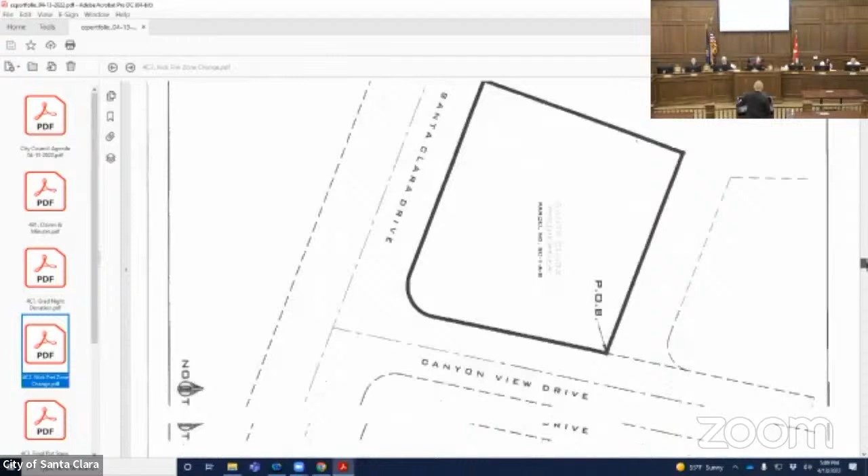So Nick Fry is here this evening. He's the owner of the property and would like to rezone it. Let's scroll down to his site plan. We have a conceptual site plan laid out, as well as building elevations, so both the Planning Commission, which held their meeting a few weeks ago, and the City Council could get a feel for what's being proposed by the applicant on the property.

The property is currently zoned planned development commercial. The applicant would like to rezone to the commercial zone to allow for a new bakery and manufacturing use on the property, the new building you can see on the conceptual site plan. Currently these uses are being conducted in the back of the existing convenience store, so we wanted to provide you with some information so you could see the plan.

You can see where the proposed building would be located, the parking, and the layout of the site. The applicant would move forward with painting the parking spaces on the north end of the site, as well as the southeast end, where there's currently vehicles parked from time to time but no designated parking. You can see the designated parking plan in front of the building. Also, a dumpster enclosure is something we've talked about that's not currently on site, as well as making some improvements to landscape areas - that's something we'll discuss at a later date.

But right now, I just wanted to give you a little bit of history of the site - in case you didn't know it, you probably know it better than I do, but a little research here.

Nick went through a rezoning process in 1986. The property was zoned R110 at that time. He had it rezoned to neighborhood commercial so he could build Dutchman's.

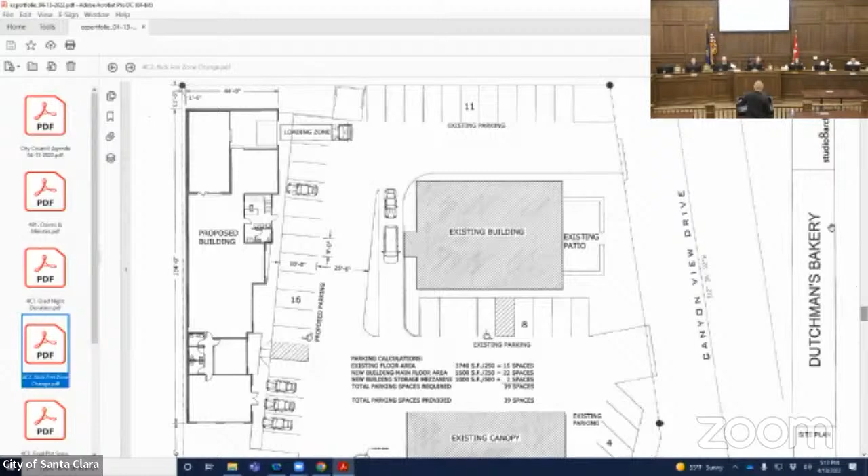If you could go to the building elevation, I believe it's right after this. They're conceptual in nature, you can see the drawings here. You see the existing Dutchman's with the red roof, and you see this building. It would be stucco and I believe a CMU split face gray block with some metal awnings.

You can see to the left, maybe to your right or to my left, that end cap would be for an office space, and the rest would be for his warehouse and manufacturing business associated with his brand and what he's currently doing in the existing building.

As far as state code consideration, we do meet all those requirements. We noticed it, we put signs on the property, put it on websites and posted it in public locations. The Planning Commission held a public hearing on March 24th, 2022 and forwarded a recommendation of approval to the City Council.

At this time, planning staff recommends that the Santa Clara City Council approve the Nick Fry rezone from the planned commercial zone to the commercial zone for the property located at 2300 Santa Clara Drive, subject to the following conditions, and we have two. First, that the applicant be required to submit a site plan application as per city code, chapter 1766, commercial zone.

Second, that the applicant be required to go to the planning commission and city council for site plan review and approval. So if this rezoning is approved, the applicant will come back to both the planning commission and the council as per the zoning ordinance, and go through that process. And then subject to the following findings, that the rezoning is compliant with the Santa Clara City General Plan, section 3-4-2 mixed land uses, Main Street commercial.

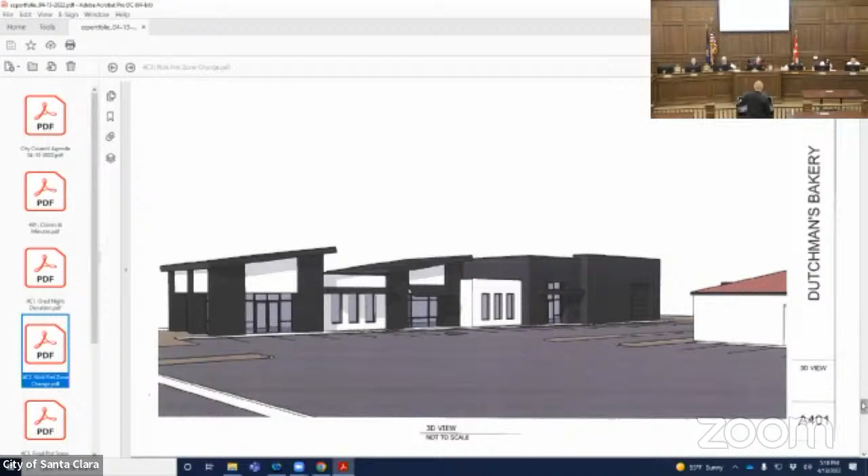Okay council, if there's no other questions, then I would look for a motion. I move that we approve the zone change from PDC to commercial to accommodate the new building. I'll second. A motion by Denny and a second by Jarrett to approve the rezone from PDC to commercial C zone on 1 acre of property at 2300 Santa Clara Drive. Any question on that motion, council?

Probably just include the recommendations. I mean, maybe it's part of it, but there were 2 recommendations. Is that right, Jim? Yeah, we had 2 conditions plus 2 findings. Okay, make sure we're legal and compliant with our general plan. But double check the one condition. Yes, I will check on that this evening or tomorrow morning and get with Chris. And we'll make that part of the motion. I'll second.

Any other questions, council? This is a zone change, let's do roll call vote. Jarrett, aye. Denny, aye. Krista, aye. Lena, aye. Ben, aye. You guys have it.

Get her done, Nick. You're our first manufacturing facility, make us proud. The Dutchman, you know, some cities have caterpillar plants. We got Dutchman cookies.

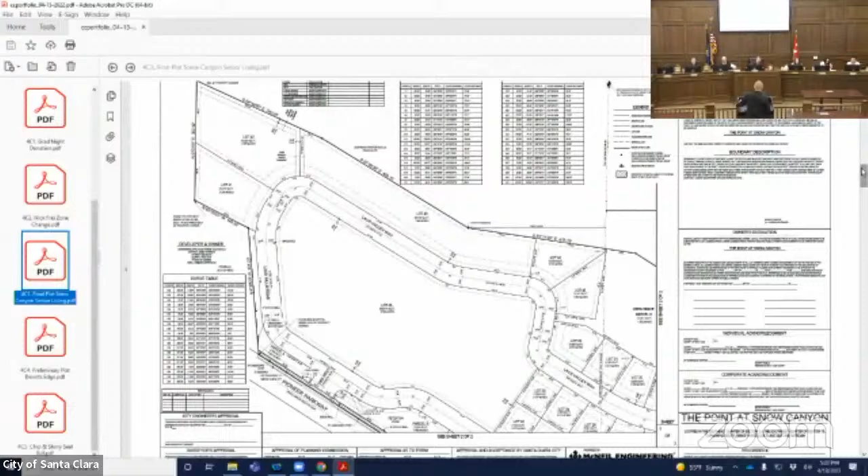Previously, when this was reviewed, when it went through a project plan amendment and preliminary plat, we did take a look at building materials, amenities, and site landscaping, and that went through a planning commission and city council process. At this time, I'd like to go through a few highlights or items we need to discuss here at final. The plat is up and it's a final plat. Our next item is preliminary, so I will try to keep my focus on this one.

When this went to Planning Commission on March 24th, we had a discussion on public streets. Logan Blake's on our Planning Commission now. He's a PE, and he did ask that question about the streets, that they be identified as public streets. So all the streets in this project are public. Next to the street name, it will say public street on the final plat, just to make sure we're clear. I've seen that in other places I've worked, just making sure a public street is identified. So that's something I included in the conditions if the council's comfortable with that.

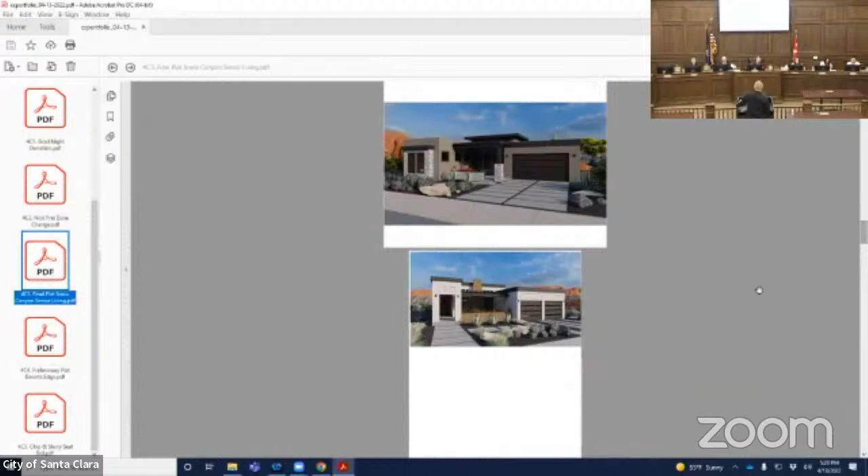As far as the building design and materials, I think if we scroll down, and I do have quite a few exhibits in these two, but we get a feeling here for the single family homes, quite nice. The look fits in with Entrada and the adjacent neighborhood. Materials include stucco, natural stone, a roofing membrane system, and decorative metal to provide visual interest. We believe these single family home designs are quite nice.

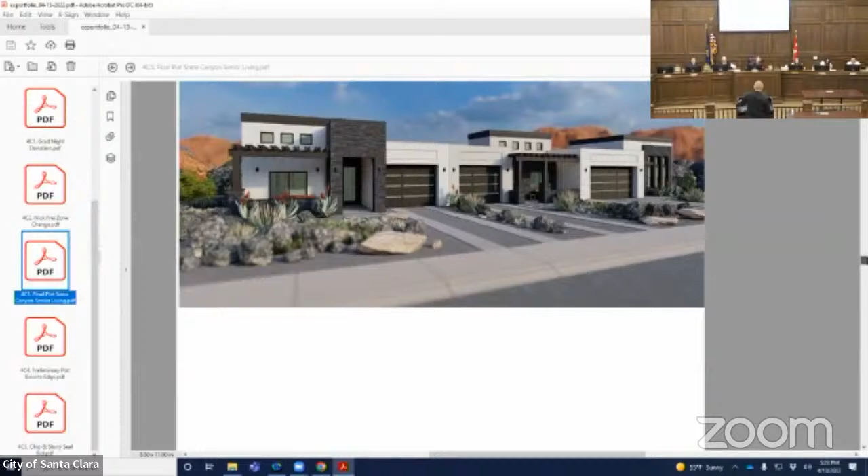If we scroll down further, there's the twin homes we talked about, 15 of those, and those are quite nice, the multifamily twin home style. Further down, we have an assisted living rendering. It's nice, very similar materials. It's got a portico, which is the architectural feature you see there with the individual. That'll be really good for inclement weather, like the big old windstorm we had the other night that messed everybody's cars up if you had one outside. But that'll be nice for loading and unloading.

The project has been designed to be compliant with the PDR zone as far as height. The height standard is 35 feet, that's the maximum height. So this building will not exceed that height requirement. Kind of going back and forth, I just don't want to make Brock go up and down too many times on these drawings.

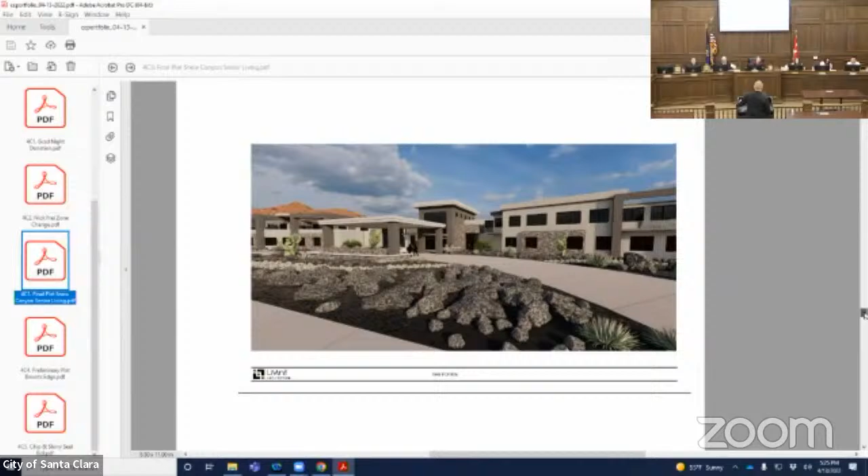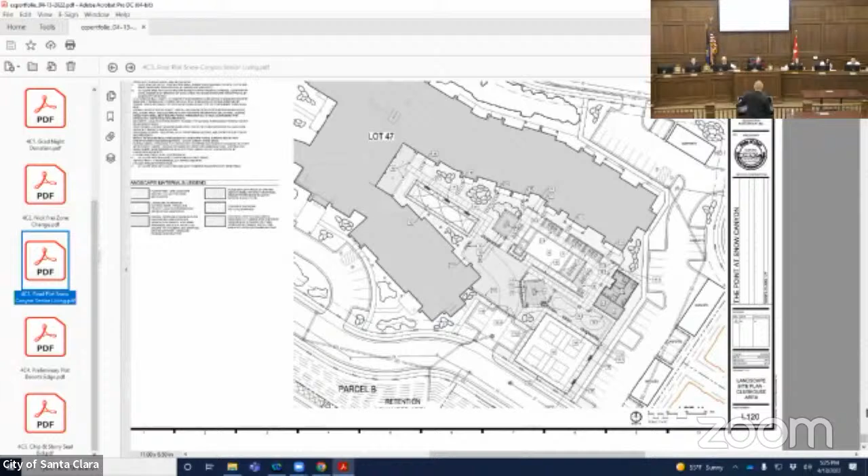It packs a punch. So the proposed amenities include a pool house, an outdoor pool and hot tub, outdoor fire pits, pickleball courts, a bocce ball court, putting greens, and seating and lounging areas. Inside the building, there's a golf simulator and an indoor room with bar and business lounge that can be reserved. Additionally, on the plat, and we'll go back, we don't need to do that yet.

We do have the open space area identified as parcel B. That's to remain more in a natural state with some trails and some seating areas, more of a natural look rather than an improved look. These amenity areas will be available for all residents and guests of the senior living community.

That's what's required. The landscaping - they've spent quite a bit of time on the landscaping plans. We've spent a lot of time reviewing them as well. They're going to be required to meet ordinance 2205, which is our new water efficient landscaping and conservation standards.

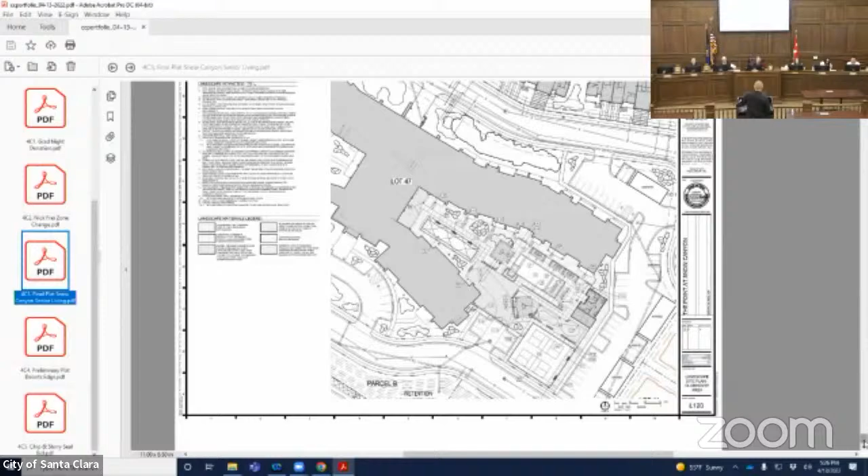The zone does require a minimum of 30% open space. The applicant and designers have indicated the plan includes approximately 40% open space. If we go back to the preliminary plat, there's a couple things I'd like to bring up.

As far as project fencing adjacent to Pioneer Parkway, there will be a 6-foot stucco wall that will be required to be put in, and the applicant's aware of that.

Also adjacent to Pioneer Parkway, there'll be a planter strip and a sidewalk. The applicant's required to install a 10-foot planter strip and a 5-foot sidewalk along Pioneer Parkway, as it is an arterial roadway. So that will be a nice feature for residents here and other city residents that live in the community.

Recently, we've talked about water availability, and I have to bring it up because we adopted the ordinance, the model ordinance, and we made some changes to it. That's section 1792 of our code now. It's been adopted and put into ordinance.

Within that, we talk about a will-serve letter or other verified documentation from the Washington County Water Conservancy District prior to final plat recordation. There's been a little bit of back and forth, but that's the wording the way I understand it, and we'll need something from the Water Conservancy District.

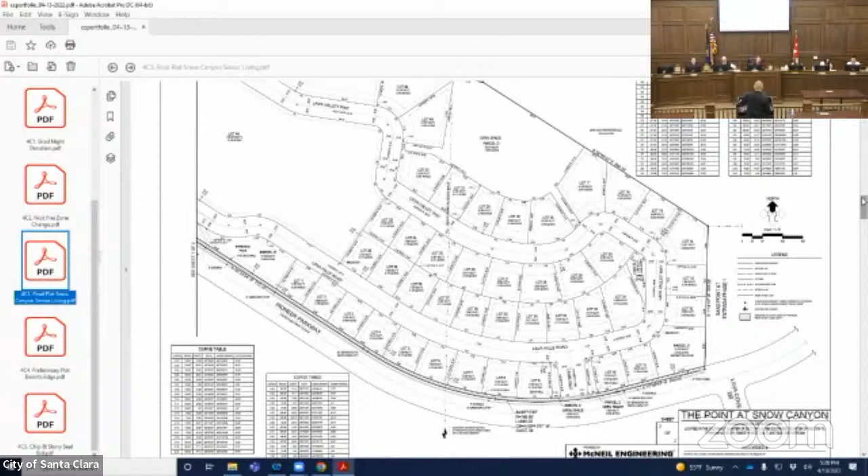We talk about dust control, it's major. This is a big project. We've had a little bit of that already with utility and road work done out there, or the temporary road for the sewer line. So we need to make sure, and the applicant's aware of that. I just wanted to bring that up.

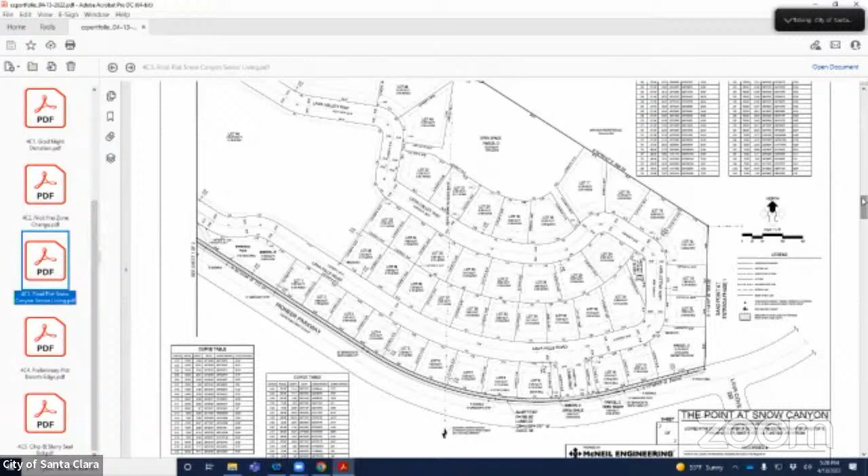Reviewing departments, we've had a pretty thorough review. As you can see in the report, the building department - a geotech's going to be required. Parks and trails - this is something that Brad has helped us understand, and I'm glad we have it here and the applicant's willing to do it. They will provide a trail gate in the western wall, or the west part of the site where there's a wall, and it's a minimum of 6 feet wide to get to the trail in the area.

Fire and police - their concern was making sure we had access for emergency vehicle or apparatus within 150 feet of the assisted living facility. Power department, public utilities required, public works - again PUEs and signature blocks on a final plat. State code considerations as far as noticing and having public meetings. We've met all the statute requirements.

So our recommendation is as follows. The Planning Commission held a public meeting on March 24, 2022 and forwarded a recommendation of approval to the City Council. At this time, planning staff recommends that the City Council approve the final subdivision plat for the Point at Snow Canyon Senior Living Community, subject to the following conditions. We've outlined 12 conditions in the report.

And then condition number 2, there was a sentence added that said all public streets be labeled as public streets on the recorded plat - kind of what Commissioner Blake recommended. Let me know if you're okay with that.

The applicant, Clint Tolman, and his engineer are both here if you have any questions of them. Do you have any questions for me at this point? Questions for Jim, council? All right now. Okay, thanks.

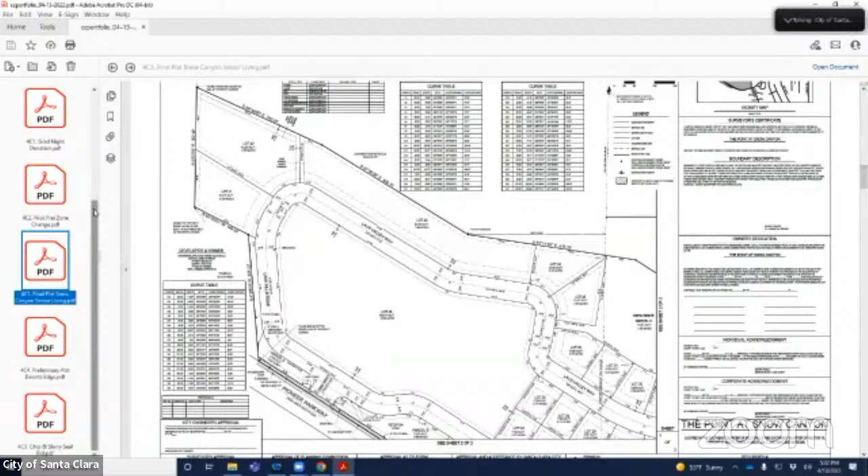Okay. Item C4, consider approval of a preliminary plat for Quail Crossing and Coyote Landing at Desert's Edge, generally located east of 400 East and north of Northtown Road. Robert Smith, applicant. Jim?

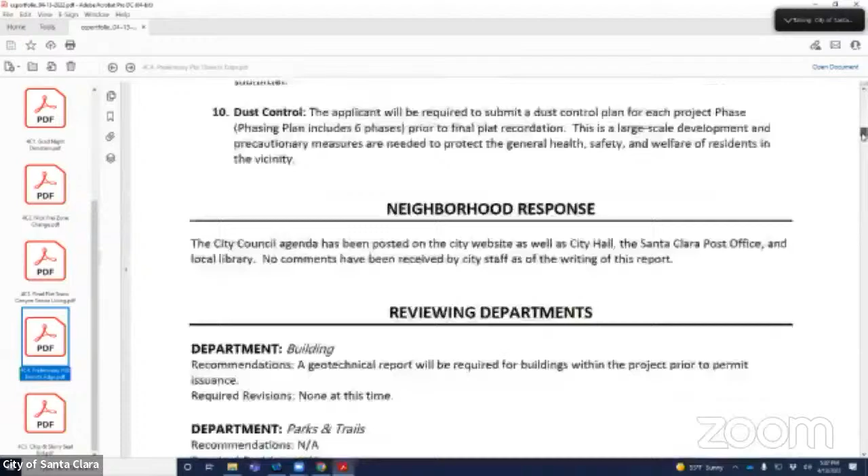Thanks, Mayor. So we've got this one back to you tonight. It's an exciting project that we've talked about a few times. Most recently, we had a discussion in March about the phasing or the project plan. The applicant, Robert Smith, came to the council during a work meeting to discuss a slight density increase to the plan of one additional unit. That item was taken to the Planning Commission on March 24th and approved by them before we discussed the preliminary plat that evening on that agenda. So they did allow for the density increase of one additional unit to 240 units. The property is just over 20 acres in size, so the proposed density is at 11.99 dwelling units per acre.

And so the preliminary plat is up, and that's where I want to work from for now. So thank you for bringing that up. There's a lot here in the preliminary plat, it packs a big punch. There's a lot going on here. It's both projects, it includes Coyote Landing and Quail Crossing at Desert's Edge. One is a multifamily townhome product, and the other is an apartment project designed to be affordable, with rents ranging from 30 to 80% of AMI. The applicant has captured Utah Housing Assistance and will be utilizing that program. I believe the great majority will be at 50% of AMI, but we'll let the applicant clarify that if the council would like to have that discussion with him.

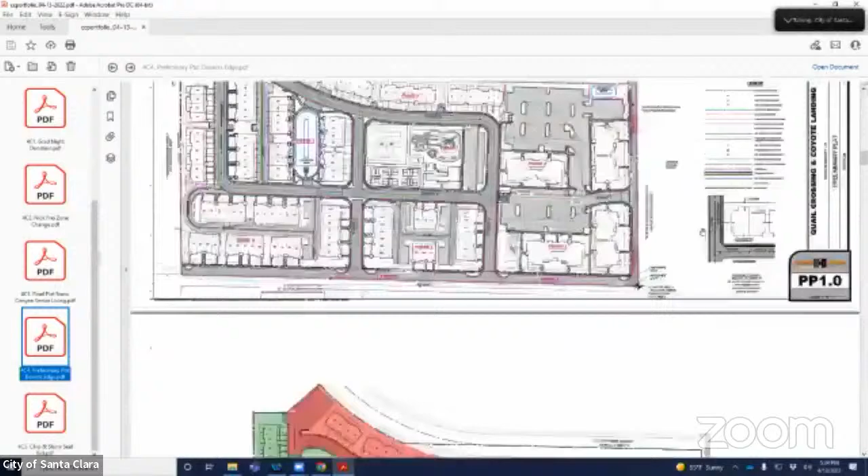What I'd like to do now is go to the next sheet, the phasing plan, for a few minutes. There's quite a bit going on with the phasing plan. They're looking to do 6 different phases, and each phasing plan is included here. So phase 1, in the red or salmon color, includes 24 townhome units, centrally located amenities, boat and RV parking, and public roadway improvements, including 2 required public accesses to 400 East. There's quite a bit. You can also see some improvement on Northtown Road and a detention area up in the northeast area as well, so there's a bit of improvement that will be going there.

Phase 2 will include 60 apartments within 2 buildings, shown in tan, with some project amenities, required parking, and primary access to and from the project from Northtown Road. Phase 3, in green, is a bigger phase, including 44 townhomes, centrally located open space, a detention basin, private alleys, and some public road improvements on the main roadway. Phase 4, in purple, includes 32 townhome units, a private alley, and required parking spaces. Phase 5 includes 20 townhome units, shown in blue, 2 private alleys, and required parking spaces. Phase 6, in blue-purple, includes 60 apartments within 2 buildings, a detention basin, required parking, and extension of a private driveway system.

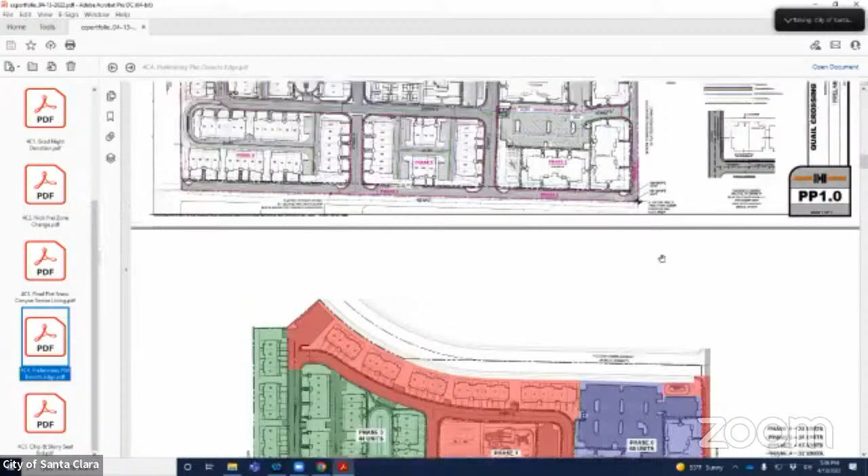So now if we can go back to the preliminary plat, this is the overall project. They'll come back in phases, 6 phases for final plats that would come back to you at a later date. The public street improvements are required to meet city standards and be installed or bonded for prior to plat recordation. Again, the total of 6 phases, each of them are required to include public improvements, and each plat will be recorded. As plats are recorded, that right of way or roadway will be dedicated to the city.

So the building setbacks here are unique. I've discussed that a little bit in the report. Coyote Landing includes both front-loaded and rear-loaded townhome style units, and so it really is a specific plan for the project, and we're looking to have the setbacks work for the project and address this issue now rather than later.

What we're proposing is the front-loaded townhomes that front on a public street, which is most of these. If you go back to the phasing plan, phase 1 includes front-loaded units. Those front-loaded units that back onto Hamlin would have a 20-foot front setback, and the rear setback would be 10 feet. We're talking about 12 feet between buildings, sometimes 14 feet. Generally the building code's minimum is 10 feet in between, but we've got more here, so let's make sure there's ample space.

If we go to phase 3, it's a little bit different. We have a couple buildings on the right-hand side facing the public street. Those buildings front onto the green space and then back onto the public street. So we're requiring a deeper driveway there, a 20-foot driveway, just like a front load. And then they can have a front setback of 10 feet from the sidewalks because they front on a green or open space area. So that's kind of the give and take on these.

With some of the others in phase 4, you can see they're more of a walk-up style unit off of a rear-loaded alley with a 5-foot lip, which is the area between the alley and the face of the garage so they can pull in and out of their garage, and there's more parking back there. So there are some different types and unique styles, and we're trying to address them all.

We've also looked at the setback of the main clubhouse building, and it complies with the code. We do have a 20-foot front setback there that meets code, and then it's adjacent to a private parking lot.

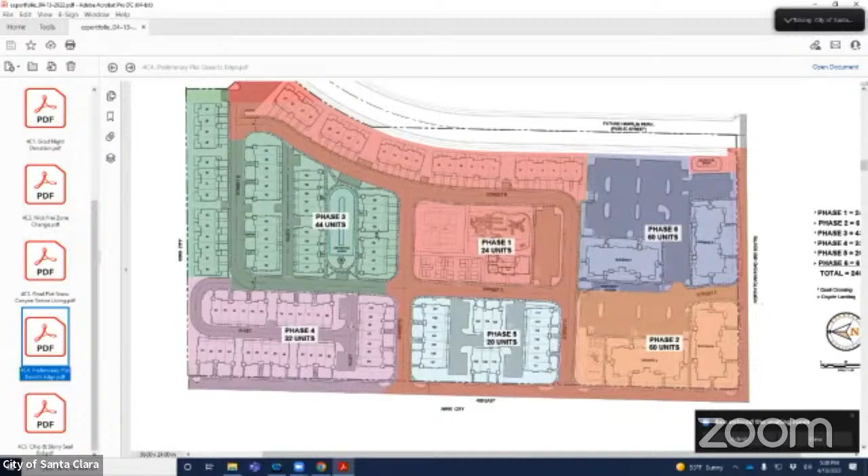If we go back to the preliminary plat, we can talk about amenities for a moment. You can see in the middle the centrally located amenities. It's going to include a clubhouse, a splash pad or water toy feature with water slide, a spa, pickleball courts, and tennis courts. Playground equipment and a community garden is also proposed for the project, over by the apartment units in phase 2. You can see the community garden and some more playground equipment over there.

Right now I believe the applicant is still researching what the final amenity package is going to be, and we're asking that be determined before the final subdivision plat approval. So when we come back to you with the phase, we want to be able to talk about that — what is the water toy feature, what's going on there, get some specifics on that.

As far as the landscaping, we do have some landscape plans at a preliminary stage. The final plans will be required to comply with our new ordinance for water efficient landscaping and conservation. Right now the code requires a minimum open space of 30%. The applicant in this case has indicated that the open space, looking at all the grounds, is approximately 41% for this project.

The project fencing — I can address that with this preliminary plat. We have two types of fencing. Backing onto Hamlin Parkway will be a 6-foot privacy wall, which is required along Hamlin. The applicant intends to utilize a CMU block as per other projects in the vicinity — you see that in Arcadia, and some pillars now over where the RV park and boat parking are for Arcadia, it's a CMU block. And then we have some open style fencing, an open style iron fence with evenly spaced pillars.

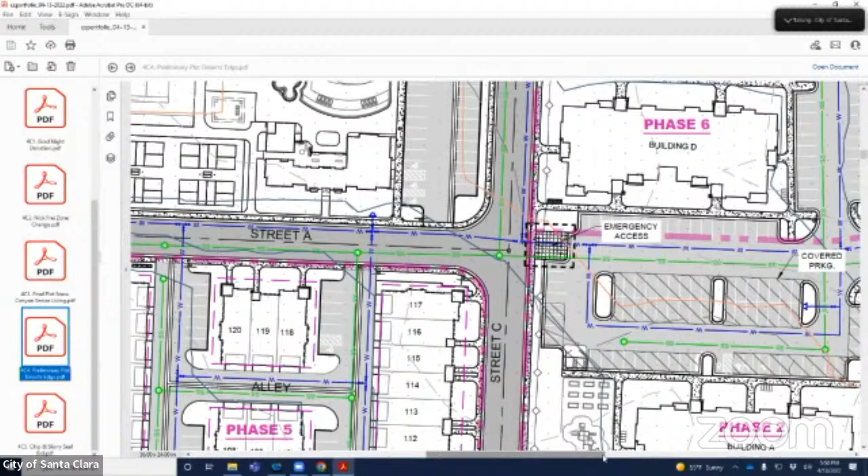I'm answering, but they would have a key or access to lower those bollards as needed, like you see on some of the trails, the newer trail networks. We certainly don't want a crash gate. We want something that's more user friendly and pedestrians and cyclists can get through there, and kids can go see their friends and neighbors. Connecting neighborhoods is good planning, so we're doing our best here. Yeah, so the bollards are the most secure, they take time to remove. You got to get a key and then lift those, but they obviously prevent vehicles, is the main thing. Pedestrians and cyclists can go through, but they're the most secure, but most timely for us to remove. But in the TRC meetings, we'll review that and make sure we get what's efficient for us and also meets the intent. So, perfect, yeah.

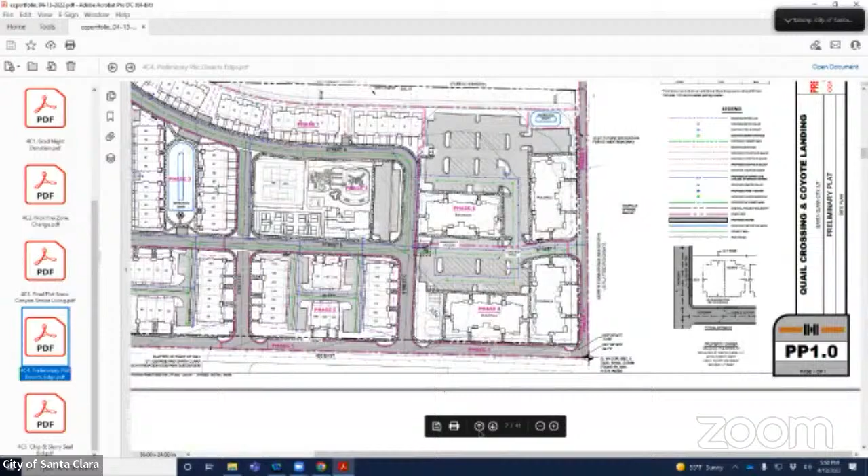Any other questions, council? Just remind me the short-term rental aspect, what was the number that was approved without going back through? Up to 120 units for the townhomes. So the townhome component, which is half the density of the project, can have short-term rental, all the units. Now, we can let Robert speak to that. I don't know whether or not that's the intent that every unit will be used for short-term rental, but that's how we approved it. Okay, back last fall for that component, not the apartments, just the townhomes. Perfect.

Any other questions, council? We've heard a lot from Robert, but he made the trip. Anything you want to add, Robert? Oh, I actually have a question for him, for Jim? Robert. For Robert, go. Good, good.

So I looked up your approval with the Utah Housing Corporation, and it looks like half of your units you're going to approve under the affordability from 25 to 50%. So my question is, are you intending to do those in phase 2, in those 2 buildings, or are you intending to hold them off to phase 6? The approvals we've got right now are for phase 2, everything's phase 2. So the 60 apartments, the AMI between 25 and 50% is just for phase 2.

Perfect. I assume that our phase 6 will do a similar application with similar 25 to 50% AMI. Those numbers are really good. That's a great question because AMI is up to 80%, so this is quite a bit lower. Yeah, his average was 43. He should really be commended, council, if you don't know, the average for his project was 43%. And that will put rents for those units somewhere between $695 and about $950, $960, something like that. Yeah, it's incredible. Wow. Awesome. So thank you.

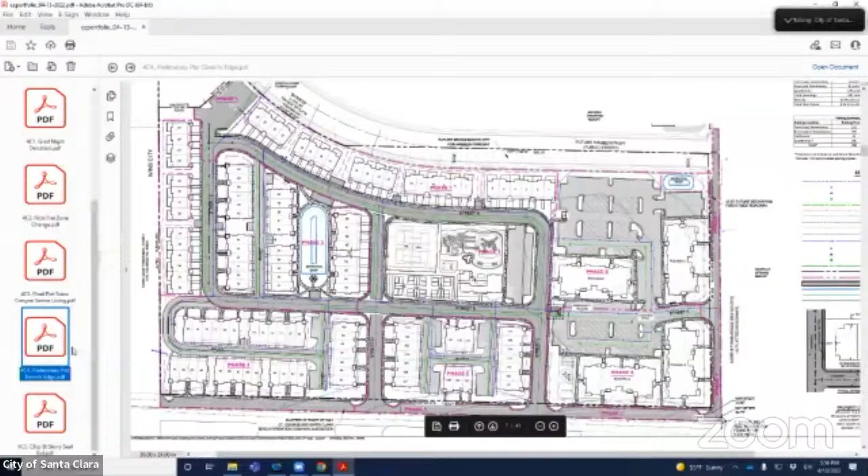Ben, Aye. Lena, Aye. Krista, Aye. Benny, Aye. Jarrett, Aye. You guys have it. Good work, Robert. We'll see you soon.

Okay, item C5, consider approving the spring maintenance bid for the chip seal slurry seal project. Mr. Mouritsen, Mayor and Council, I have to apologize for the application I sent in online.

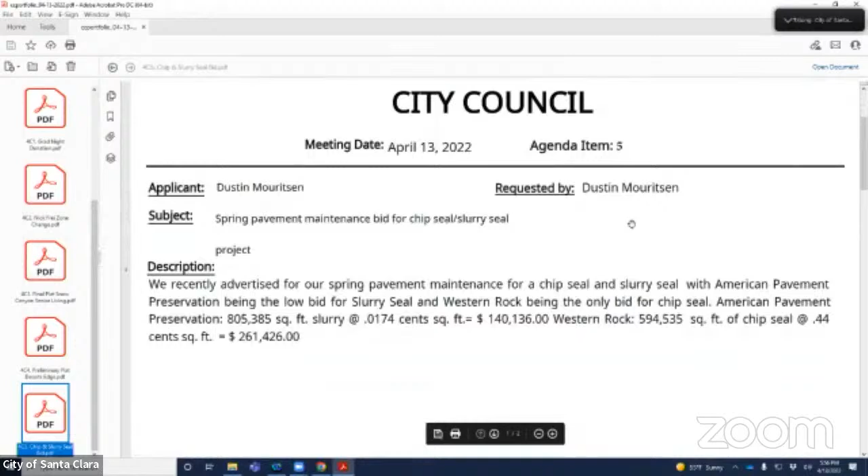It was tough getting bids and things have changed since then. Even as I sat down for this meeting, I got another bid on email through my phone. So that changes the handout I even gave you. I'll try to walk you through it the best I can.

So we advertised for our spring maintenance program for a chip seal with fog coat and a slurry seal. The slurry seal was pretty simple. We got 3 competitive bids. American Pavement Preservation came in at 17.4 cents a square foot.

Western Rock was the only bid up until just now for chip seal. They came in at 44 cents a square foot, which is double the engineer's estimate, which is pretty common now since oil's at an all-time high. Then right as I sat down, I got another one from Interstate Rock and it came in at 63 cents per square foot. So that might make this decision easier.

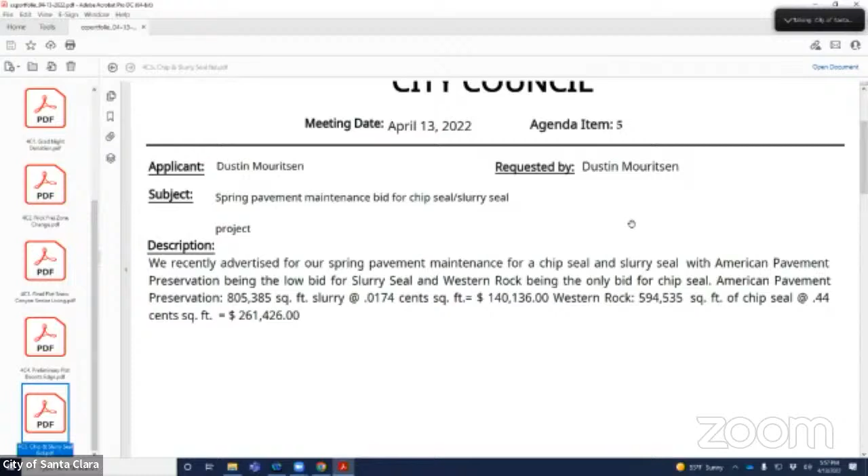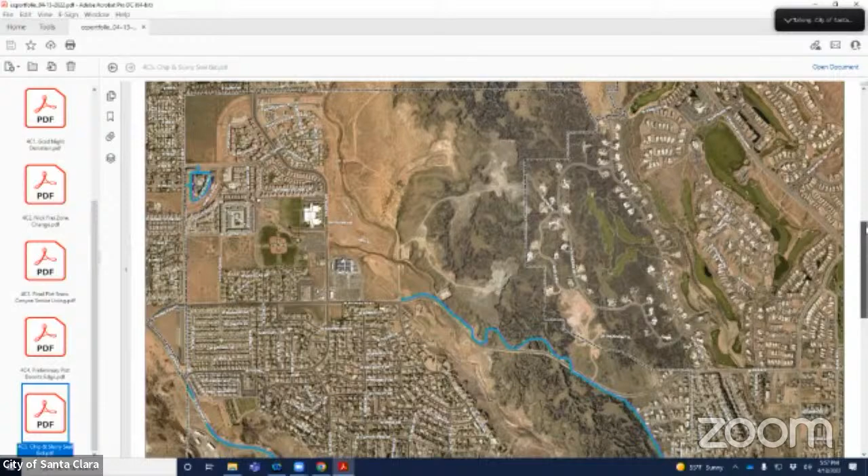So on option 1, we do the slurry seal through American Pavement, 625,000 square feet at 17 cents, for $108,795. And we'd rebid chip, but I don't know after that second bid coming in if that's the best option at this point. Option 2, we originally had Santa Clara Drive from border to border, Gates Lane, Country Lane, Clary Hills, and the lower portion of Canyon View on the list to be chip sealed.

We removed those streets except for Santa Clara Drive, the downtown portion, the 5-lane portion, and then we'd slurry from Swiss Village to the Ivins border, and move on with the slurry for 108,000. That would put us at a grand total of 401,000 to do just Santa Clara Drive and the slurry seal.

Option 3, we chip and fog everything, and go on with the slurry, for a grand total of 645,000. I visited with Brock a little bit, and there is some funds that have been carried over from year to year since we did no street maintenance in 2020.

One thing I want you to keep in mind, we have spent $36,000 in crack seal. The city crew's been out for several months and they've got every road crack sealed. If we wait more than about 9-10 months, they would have to be redone and closed up again before we put any kind of pavement maintenance on there.

All the roads that are up for chip seal are very high traffic major roads. Santa Clara Drive is one of our greatest assets. Along with Country Lane, it's just greatly deteriorated. I don't know if you've driven down there and seen the cracks, but there are spots where the asphalt's 6 inches round in between the sections of crack seal.

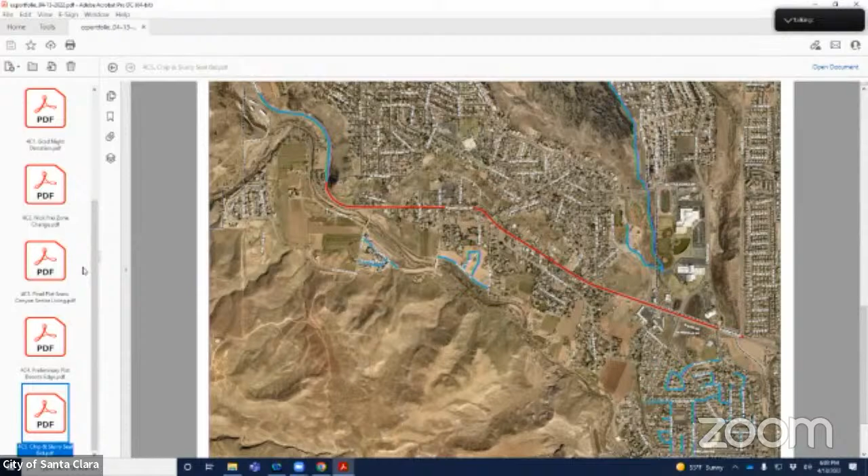Mayor and council reports, item 5.

Ben? Well, while you guys were away playing, I had a lot of stuff going on here at the city. So this can be a long report—staff and I went to Lammy's 3 times while you were gone.

Mayor, just one item, and we could all share it. The power tour that we went on was fantastic. It kind of opens your eyes to what we have and the needs we've got, but it was really fun to be a part of that. Appreciate your time, and we've got a great asset in that power grid.

That's all I have—and the employees. Well, I told them that while we were at lunch 3 times. While you guys were there, they were with us. Oh, it was with you, okay. I didn't know who all went, I'm just winging it. We do have great staff.

Thanks, Lena. Lena, want me to go? The only update I have is the fair. Just to be aware, our booth is partially up. I'll finish it next week when I take over the live plans, but the fair starts this weekend. Friday is the carnival rodeo and Saturday is the special needs rodeo. So if you're interested in going, go over for the rodeo.